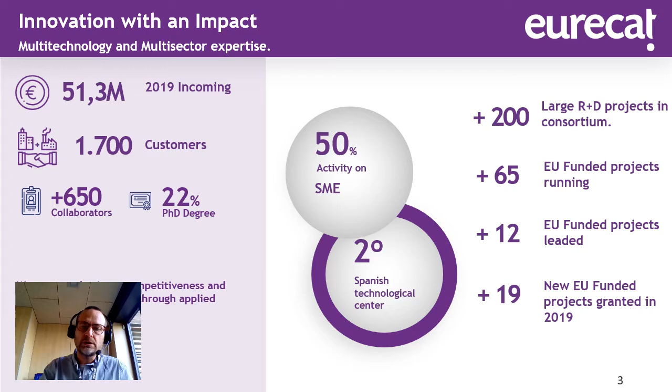We are based in Catalonia, near Barcelona. We have different locations around all the Catalan country to be closer to our industry here in Catalonia, in Spain.

We have different specialities, from water technology to medical devices, nutrition. We also work in artificial intelligence in industrial environments, on lightweight materials, and we were discussing today about this kind of material. The first technology that I would like to introduce to you is the EBIT technology.

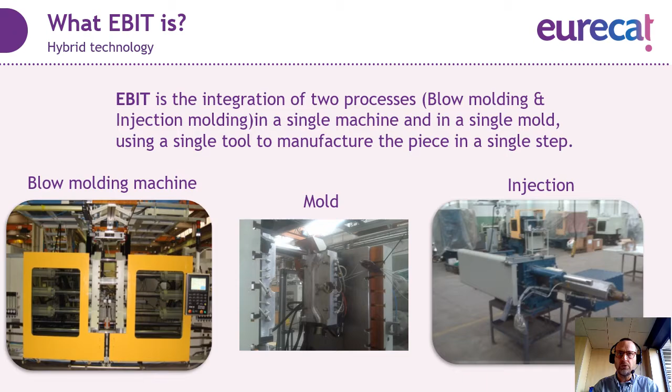It's a manufacturing technology that combines two different processes. On one side, we have the extrusion blow molding process, and on the other side, we have the injection process. And we have developed a tool that combines both processes. The idea is to be able to make a part that combines both the advantages of both worlds.

So today we have different parts in the automotive sector that combine this extrusion blow molded part with the injected part, and we have complex logistics around it because we have to, first of all, make the tube, the extrusion blow molded tube. Then you have to make in your plant or in another section of your plant the injection parts, the brackets or the fixings. Finally, you have to weld both together, and then you have the end product. So you have different scrap in different parts, and stocks, intermediate stocks in different parts.

But we have developed a machine that combines both technologies in the same machine, so you can make the part in one step.

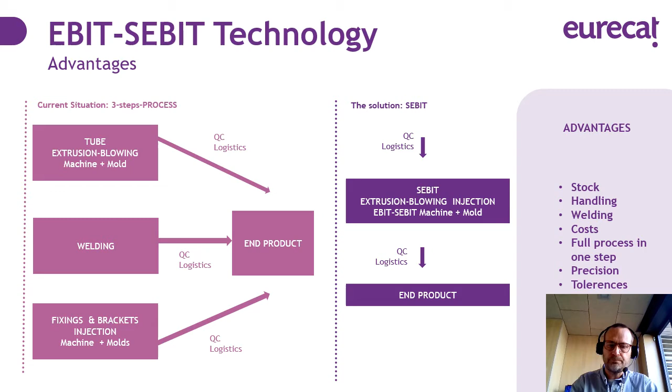Where can we apply this technology? Basically in tubes that need fixing inside the automotive sector. For example, air ducts, or fluid ducts. We could also use it in fuel tanks, for example. That's inside the automotive industry, but also other industries like bottling or industrial tanks could benefit from this kind of technology.

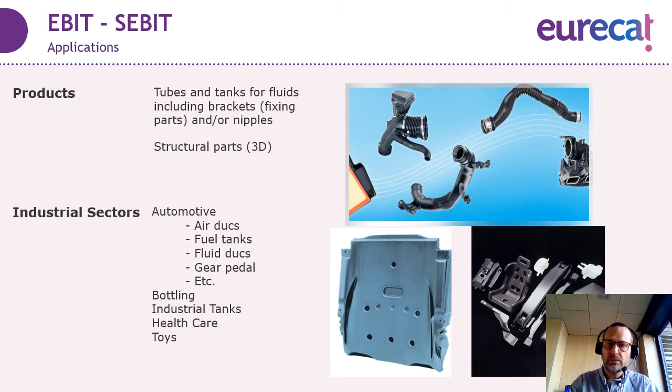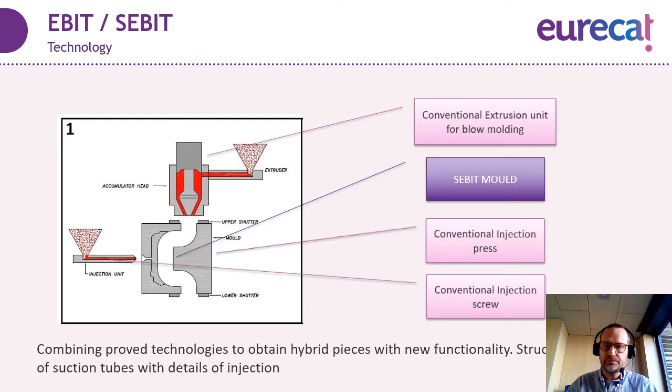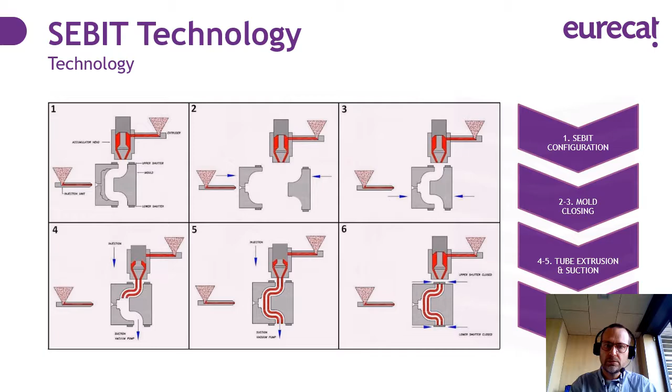In more detail, the machine works like that. First of all, there's the closing of the mold that could be inside an extrusion blow molding machine or an injection machine. With the mold closed, you have the extrusion of the tube. At the same time as the extrusion, you have the suction to be able to move the tube inside the part. Afterwards, you close the tube, so you are able to increase the pressure. This increased pressure is what allows you to mold the tube up to the shape of the mold.

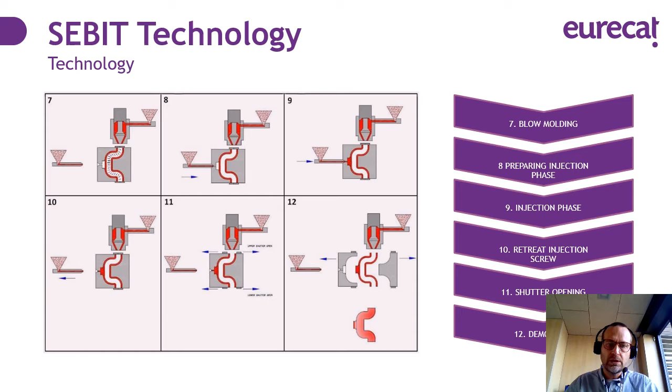Finally, you put the injection unit on, and in the injection unit, you make the injection part. Then you open, retire the injection unit, open the lids that close the tube, and finally you remove the part.

We have worked extensively on these parts, and we have worked with different materials to check the compatibility. For example, polypropylene, mix of polypropylene with polyethylene, polypropylene with talc powder, high density polyethylene, polyamide with glass fiber polyamide, or thermoplastics with different elastic properties.

And we have developed the compatibility with extrusion and injection mold. Basically, all these materials are compatible between them. For example, polyamide is not compatible, so it has no good adhesion with polypropylene. We have developed two different technologies around it.

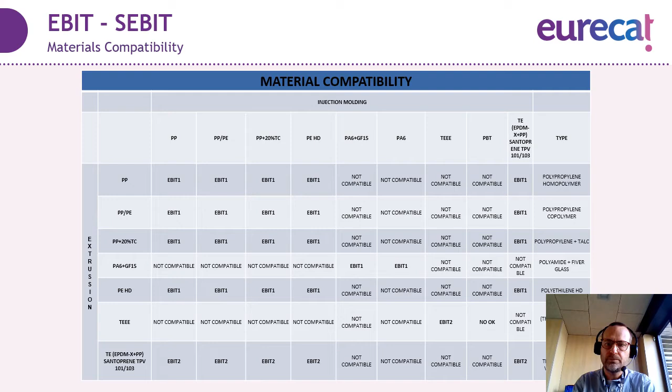Let's see an example, and I will show you what kind of parts you can do with that. I will show you this part physically. So here you have this tube with different features. Here you have an air outlet. Here you have a bracket for fixing.

This air outlet will be done in one phase of the process, and this part will be done in another phase of the process. And here you have the part. You can see the real part on that. I show it in the camera with the two different brackets.

Here you can see also another part. Here the overmolded material is in another color, so it's easier for you to see the shapes. Yeah, these two outlets.

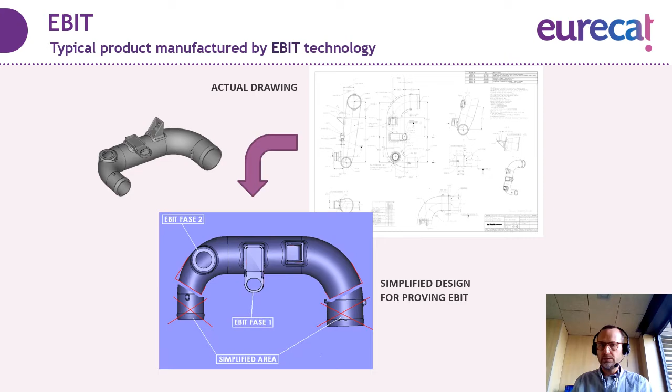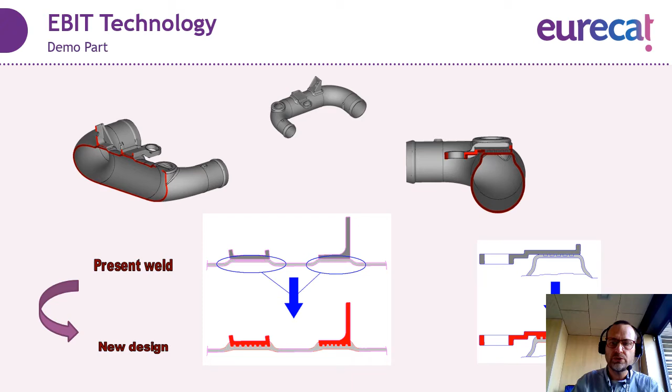Okay, we have worked extensively on how we weld the part together. We started with a welding that was a flat shape, and then we realized it was better to use this structured surface. We made these changes on design. That's the work we do as a technological center: we develop technologies, so we have to look at the defects and devise solutions to improve them.

You see the real machine. It's a Mateu & Solé, a Catalan equipment manufacturer, and this is the extrusion blow molding machine, and this is the injection unit that we work on.

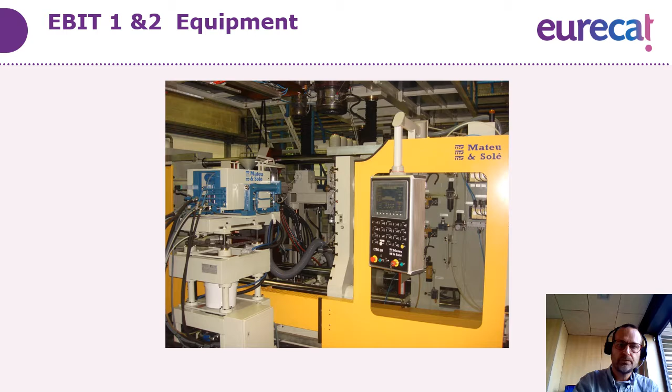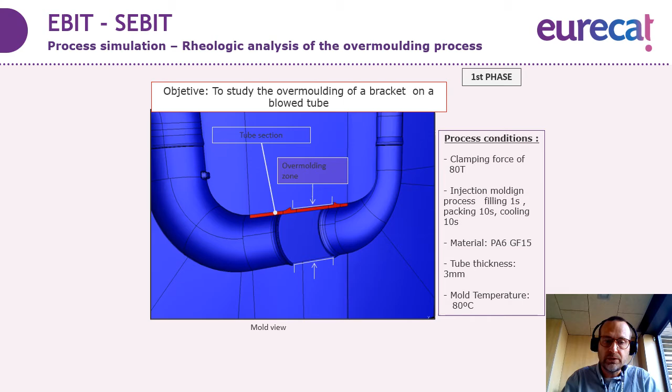As I mentioned before, our work is in developing the process, so previous to making the different molds and different solutions, we need to make simulations. We simulate the physical part that I showed you previously, and we look for different solutions to improve the strength of the junction, and also to avoid the collapse of the tube.

In the first simulation we had a collapse, as you can see here, depending on the conditions of the overmolding. Finally, redesigning the part using this corrugated, structured surface, we can withstand the estimated overmolding pressure that we have here.

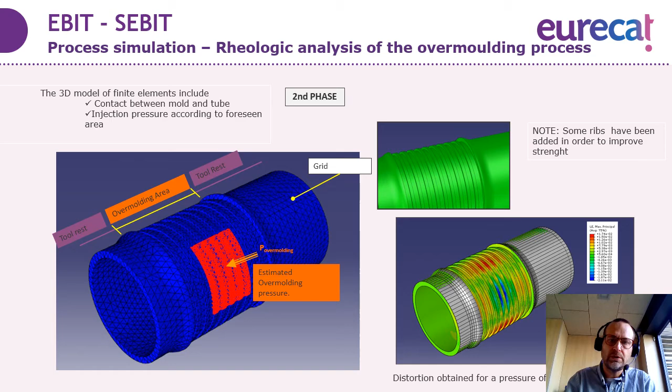You have another demonstration of the part. That's a different part that I showed you before. It's this one.

In this one, we have two different materials because the basic structure is flexible. You can see, I can bend the tube because it's a TPE. But we have also overmolded a rigid part for fixing it with a perfect welding.

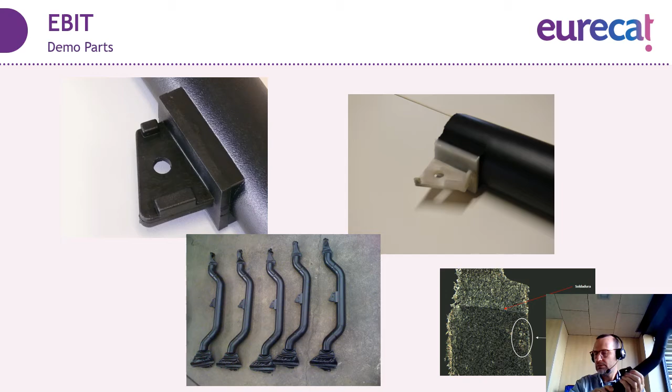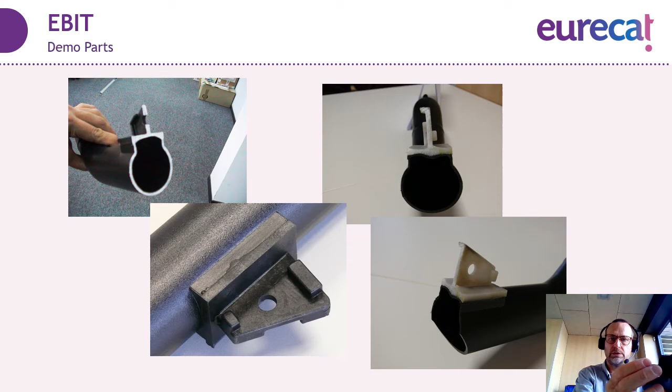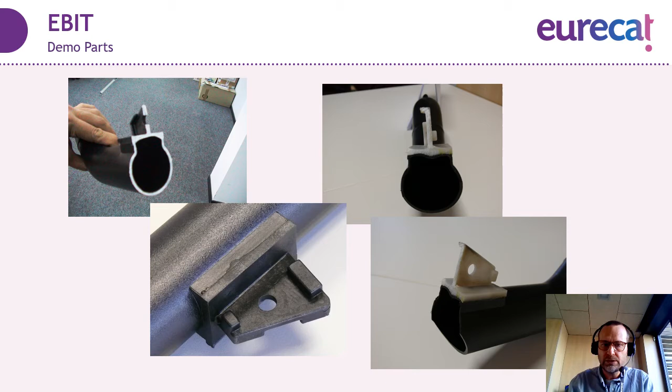Okay, you see sections of this part, for example, like here. This is the section showing the perfect soldering of different materials. That's the main advantage of this technology: we have logistic advantages, so you are able to have very good logistics that avoid all the internal management of material, but also you have the advantage of the strength of the union, so you have better unions between the brackets and the tubes.

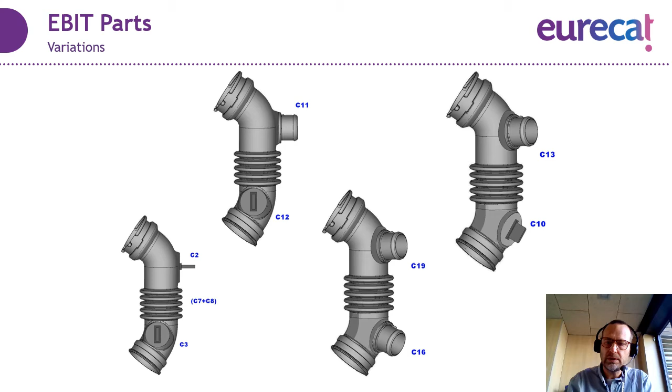This is another example where you can see all the different possibilities. You can put different nipples or different brackets in different parts. You can also have materials that are more or less flexible, TPEs or TPUs, that can be blow molded.

We made this technology evolve to a part that has a bigger injected part. The idea was to develop a structural part, combining the air conduction with the structural rigidity of the tube and the versatility of shapes that injection molding can provide. So the EBIT technology developed at EURECAT has three different steps.

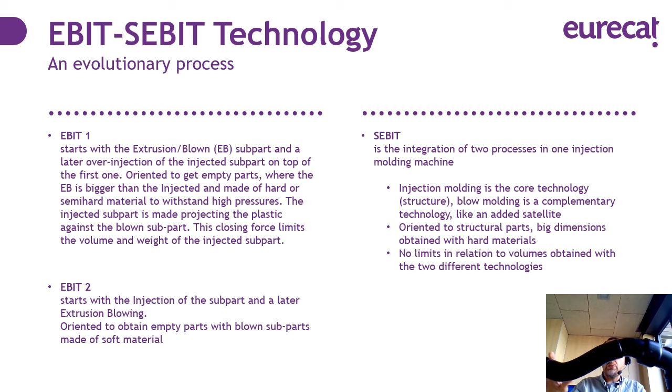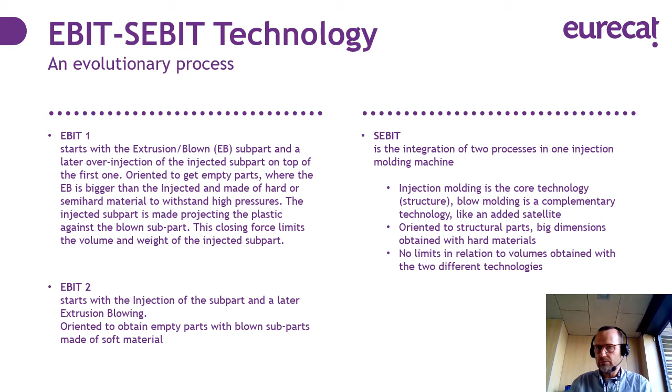One was the EBIT process, where the bigger part was a blow molded part with rigid materials, on the initial project that we did. Later on, we evolved to flexible materials like TPEs, changing the sequence of molding and blow molding, like this one. Finally, we went for bigger structural parts, like this one that I have here.

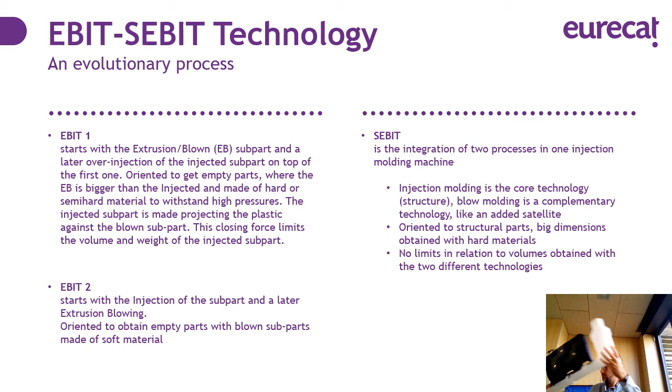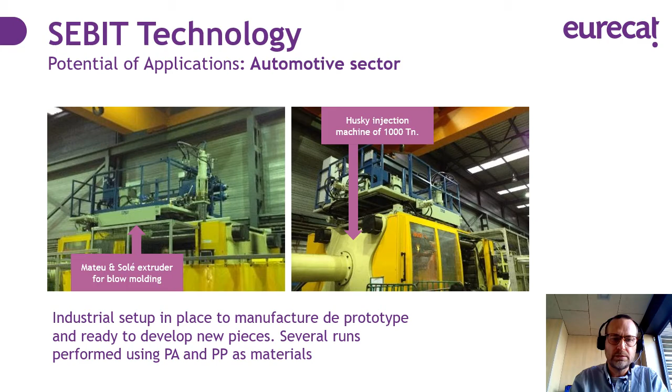That, I will discuss later. In this case, the machine is an injection machine, a 1,000 tons machine, where we put an extruder over it, and we work with different prototypes in polyamide and polypropylene.

The idea of the demonstrator was to combine the air ducts you have in the cockpit of the car with a structure that you need to support all the cockpit details. Currently, these parts have a metal structure, and then with welding you have different plastic parts over it. The idea was to translate to a complete plastic part solution where you combine the tube that has the properties for air conduction, but also provides the rigidity the part needs, with the plastic part.

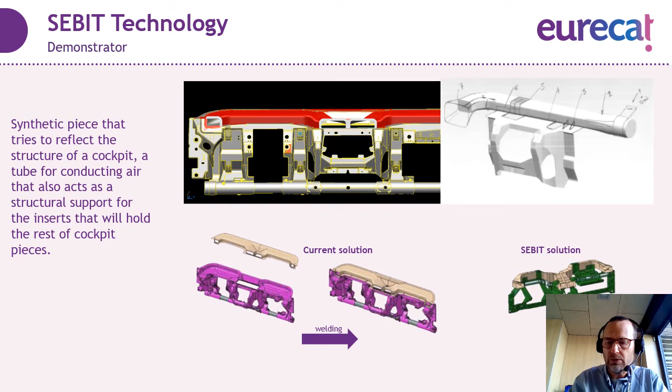Here you can see the plastic part that allows you to clip all the parts that the cockpit needs. We did this demonstrator part, where this gray part is blow molded and the red part is overmolded. So we have different sections on the blow molded part, but also different kinds of unions in the red part.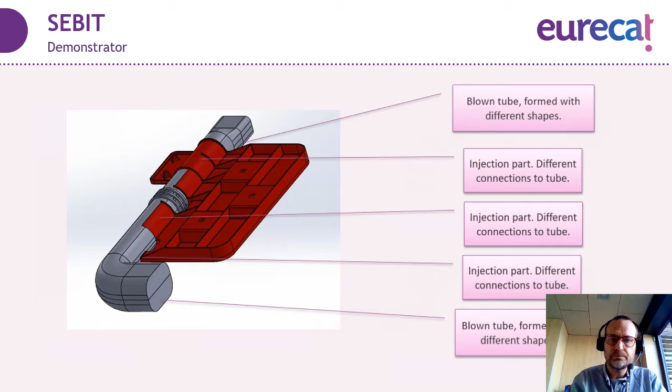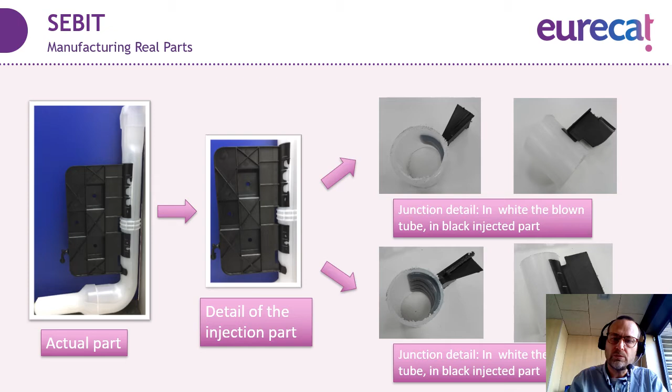As you have seen before, we also focused on avoiding the collapse of the tube, and here you can see images where the tube is not collapsed. That was one of the main issues in our development, and the other one was to test the rigidity of the union.

The union is perfect, so you have no problems, as you can see here - you break the plastic injected part before having problems in the union. So we get the expected results: we have a process that can combine extrusion blow molding with injection, providing a perfect solder between the two parts.

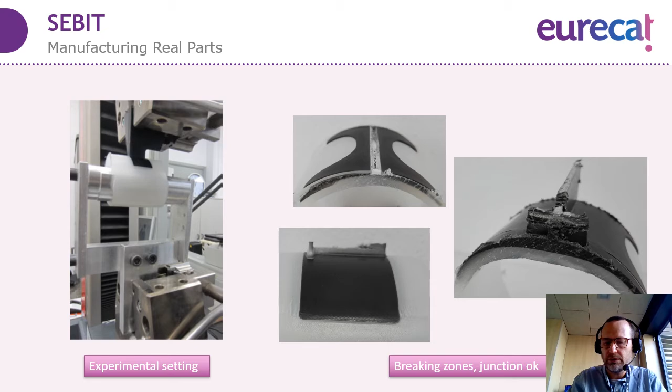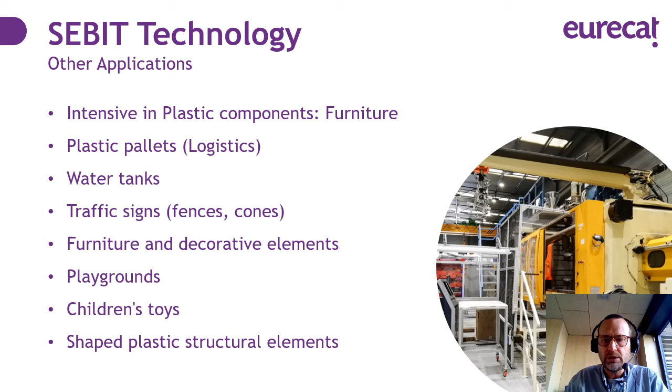Apart from the automotive sector, we think this process could also be used in furniture, in logistics, but also in water tanks or traffic signs, also in decorative elements or playgrounds, where you need the flexibility of shape that injection parts provide, combined with the structural rigidity obtained with these extrusion molded tubes.

So, to summarize, at EURECAT we have developed this extrusion blow molding with injection process that combines the advantages of both parts. We have the industrial setup to test it, and we have also the tools and the knowledge to use this process.

The advantages of the technology are the integration and all the advantages that allows you to reduce the volume of parts and to avoid this use of metal in this plastic part, so you increase the recyclability of the part. And also you have the cost reduction due to the reduction of logistics inside the production site.

On the drawback, you have to be aware that you need a very good process control, since the coordination between the blow molding and the injection phase has to be done correctly to avoid the tube collapse.

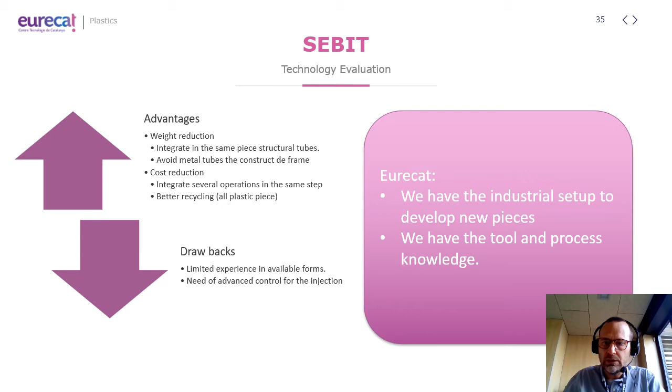Now I would like to change the topic and go to another structural part that combines not two different plastic processes, but two different materials. We will integrate inside the injection process continuous glass fiber or continuous carbon fiber.

This is the process that we have also worked on here at EURECAT. We start with an organosheet. Organosheet is a laminate of continuous glass fiber or continuous carbon fiber with thermoplastic materials like polypropylene or polyamide. These films can be thermoformed.

In the process, this reinforcement sheet is heated up, then it's thermoformed at the same time that we do the injection. We have worked with reinforcements from 0.5 to 3 millimeters thickness in polypropylene and polyamide, and we have made overmolding of these reinforcements with up to 40% glass fiber materials.

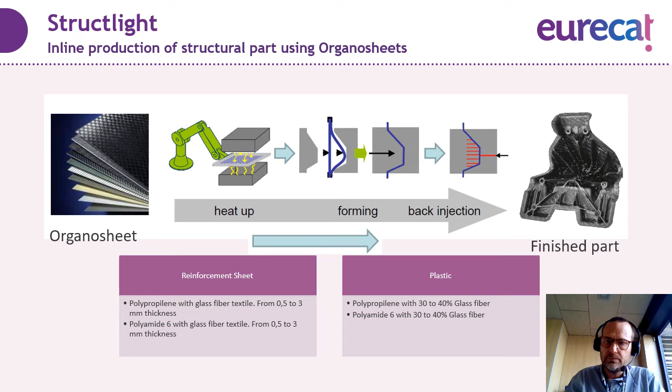We have made this demonstrator. This demonstrator is a structural part. You see here the part. It's a complete bumper, the part that goes inside the bumper of the car.

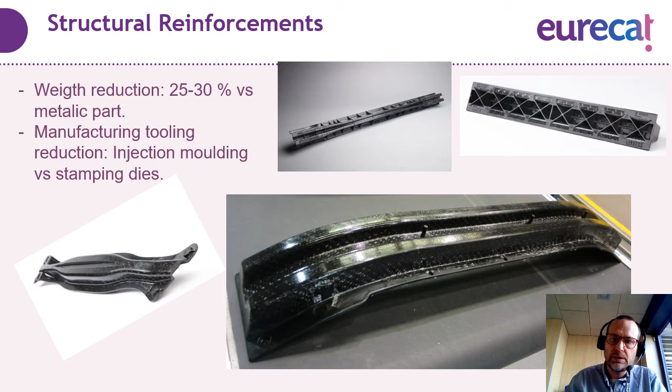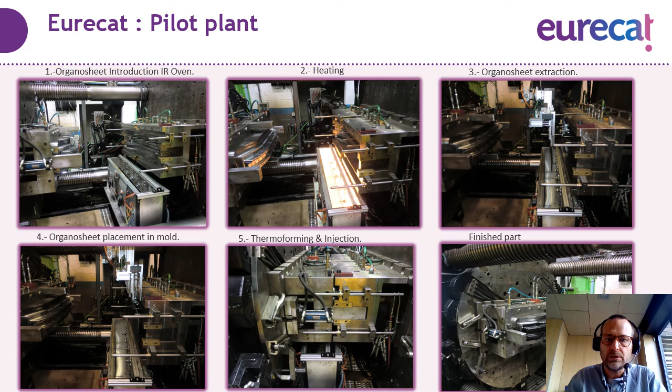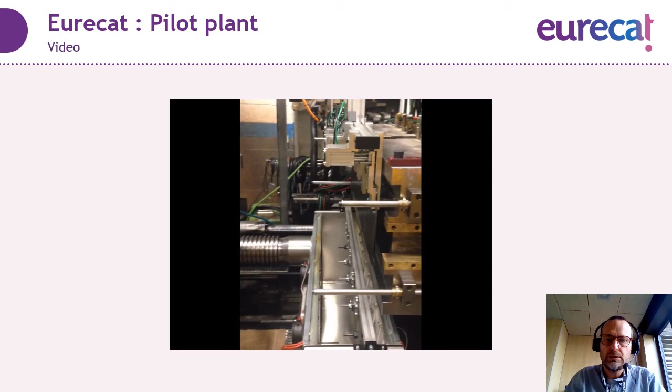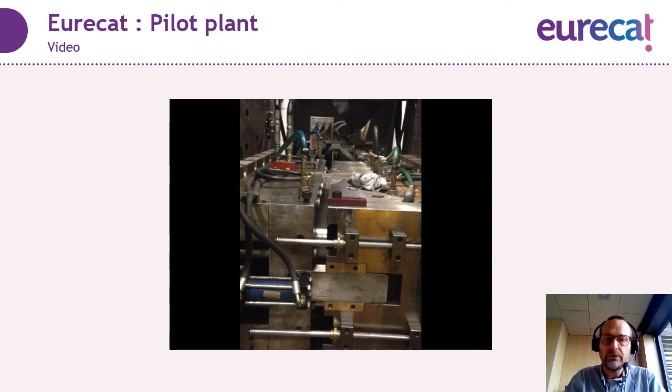Here you can see a video of the process. That's the heating part. Now the robot takes the organosheet and puts it inside the mold. Now we close the mold. On the mold closing, we thermoform the organosheet. Now we inject the plastic part. And finally, we open the mold, and we have the part ready.

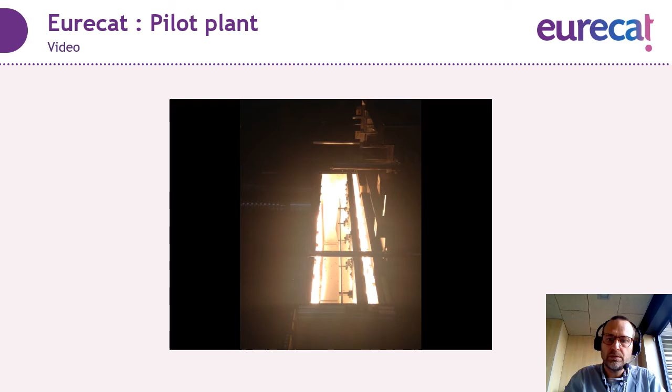We have also made small demonstrators of this part, so they are easier to test different processes and test different materials. We developed a small box like this one that I have here. The idea of this small box is that you could do reinforced boxes, for example, in battery packs, or for safety components inside the automotive, to avoid steel reinforced boxes and to reduce weight while having good properties.

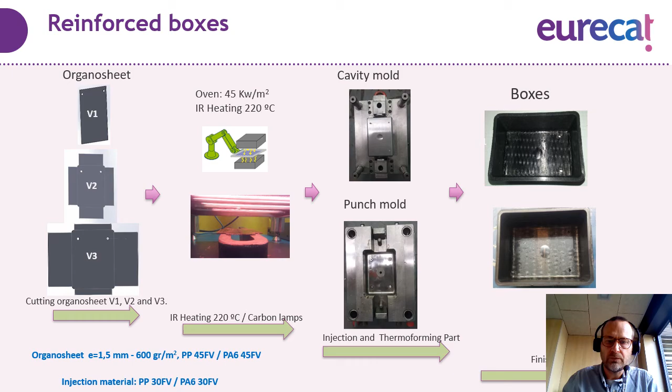We also work on reinforcing the blow molded tubes. Here you have an example of a tube where we put an external reinforcer made of glass fiber.

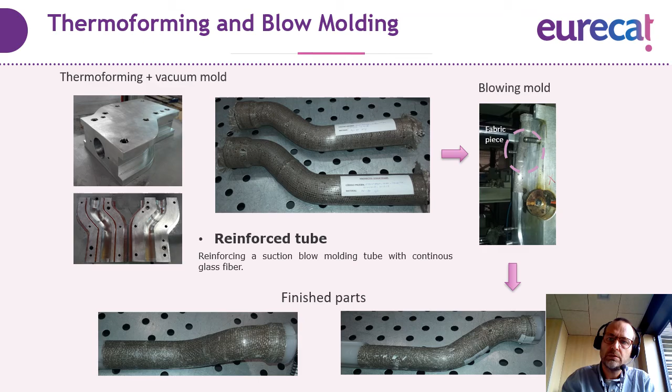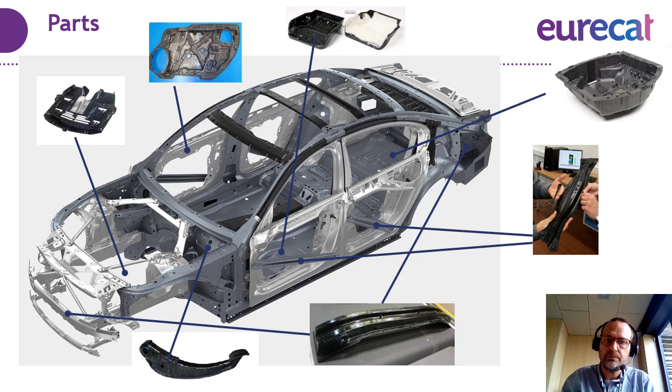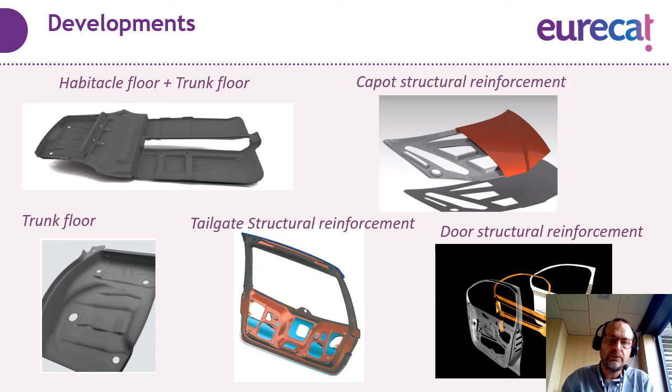These parts could be placed in different zones of the car. For example, in the reinforcement inside the door, or in the front and rear part after the bumper, but also in the seating part. For example, this is the seating part. And different parts also in doors, floors, or trunk floor, for reinforcing different zones, or in the frontal part of the car.

So just to summarize the presentation I've done, I tried to present two different processes that combine different technologies to increase the added value of plastic parts. In one of the examples, we showed you a plastic part that combines injection and blow molding.

So we can have parts that avoid all the processes to integrate the plastic part inside the blow molding, and you can have better soldered parts, or parts that have structural rigidity provided by the tube, the blow molded tube. That was one part of my talk.

And the second part was introducing continuous glass fiber or continuous carbon fiber inside the injection molding. These reinforcing materials are usually used with more conventional manufacturing processes that are less productive. So it's very interesting, in order to introduce this technology to the automotive sector, to be able to do this mass production.

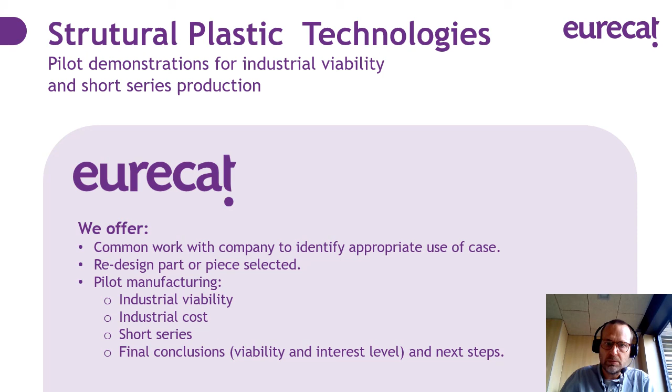process of thermoforming and overmolding these big composite sheets, reinforced sheets. At EURECAT, we are able to work from the idea to the scale up, as I've shown you in these two different examples. So we can discuss with the company the needs, but also we can re-engineer the part and adapt it to the process, and we have the installations and the knowledge to develop the whole solution, the tooling and the process. So thank you very much.